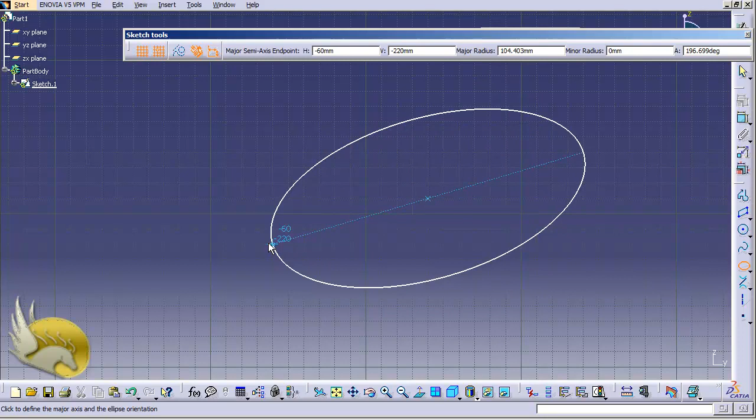For this, I need to specify the center of the ellipse. That's going to be here, for example. I want to have the major axis, and it can be inclined or horizontal, it doesn't matter. I want it to be here. Now I need to specify the minor axis, so I click somewhere here. Now your ellipse is there.

If it is not what you wish to have, you can just change the properties. Double click on the ellipse, now you can see the properties of this. I want the center to be, for example, in 40, 100 - yeah, it's gonna be minus 100 actually. So I type in here and I click OK. You can see that my ellipse changes its position according to what I have entered.

If I want to have the major radius, for example, 50 millimeters, I can type it like this. And if I want to select the minor axis, I can do this as well. And I have an angle that I can change.

And of course, I can add some constraints. You can see that by clicking on constraints and clicking on this, you have the major axis here, and it tells me as a diameter. I can double click and change the diameter to radius and see the major radius. And I can go and select this, go to constraint define and see what I can select here. You can see that I have semi-major axis, and that's exactly the radius that I have selected.

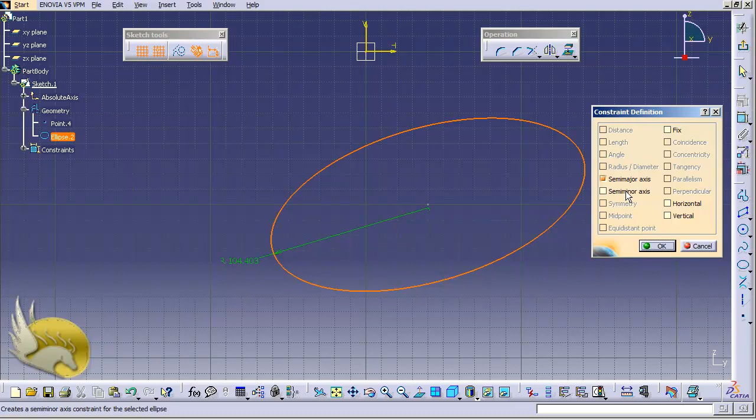And I can have semi-minor axis. I select this and you can see the semi-minor axis here. I click here, I double click on it. I want it to be in radius again, so you can see this like this. And if I double click on that, I can change it. For example, I want it to be exactly 100, and I make it 100. So whenever you draw something, you have the ability to change it by double clicking on it and changing the properties or selecting the relevant constraints.

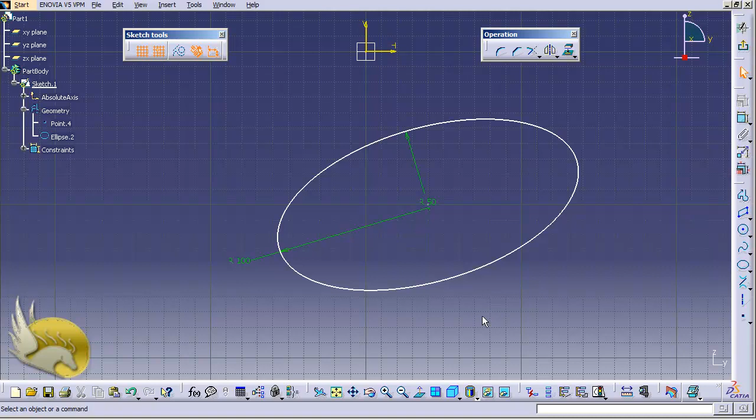Now I want to create a parabola and a hyperbola, and they are under conic shapes. Again, I will go and follow the status bar's hints. So I click on parabola by focus. It tells me select the focus first. This is the first point, and it's gonna be the focus.

Now it tells me where's the apex of your parabola. It's gonna be, for example, here. Now the start point is, for example, here, and the end point is gonna be here. Now I have a parabola.

I double click on that. If it is not what I wish, I can change it. You can see that the center can change, the apex points can change, and of course I have some polars here that tell me what is the radius, what is the angle, and what is the apex point. So I can change them.

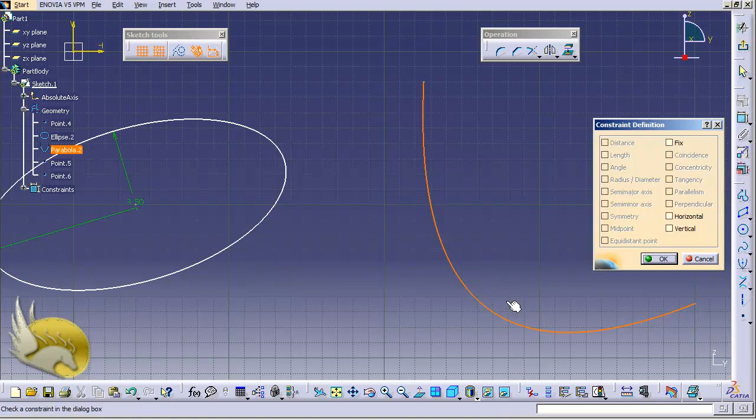And again, I can go and select constraints and add some constraints. You can see that by selecting constraints, I have nothing to assign to this, because it cannot understand anything. But whenever I go to constraint define, I can have, for example, a fix here, a horizontal or vertical, nothing more. So I need to go to properties to change it.

Let me draw a hyperbola. Hyperbola needs another click, and let's go to conics and select hyperbola here. It tells me, first of all, click the focus. This is the focus. Tells me select the center.

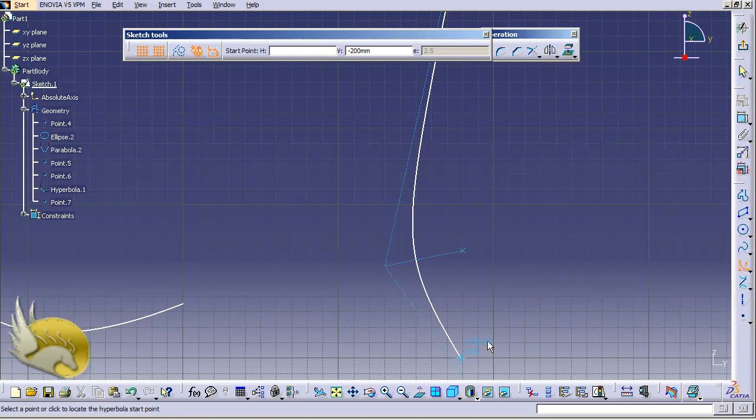Now I want it to be here. Now it tells me to click and select your apex. Now I click here, this is the apex. Start point is gonna be here. End point is gonna be here. Now you can see that I have this created.

Now you can see this constraint. There's a coincidence constraint that can find it, and I don't want to have it, so I click on it and press delete.

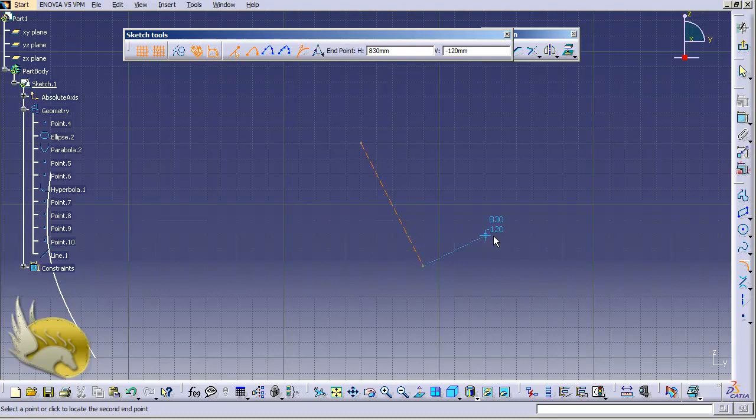And the last tool under conic shapes is a simple conic. It tells me select the first point, select the point or click to locate the tangent. I can select something or select just a point. And now it tells me select the second point. This is my second point. And now it tells me select the line, create the line. Now you can see that I have a conic that is tangent to these two lines that I just created.

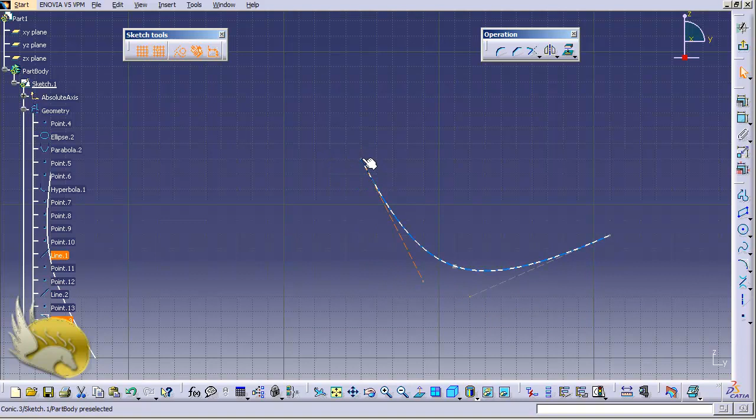And it has two limits. You can see that it has two limits, and in limits it turns to red. I want it to be like this. Now I can select these lines and move them, and by moving them I can select and change the limits, and again I have two endpoints. I can move them as I wish.

Again, I can double click on it and have the Conic curve definition dialog box here and change whatever I want. And that's it.